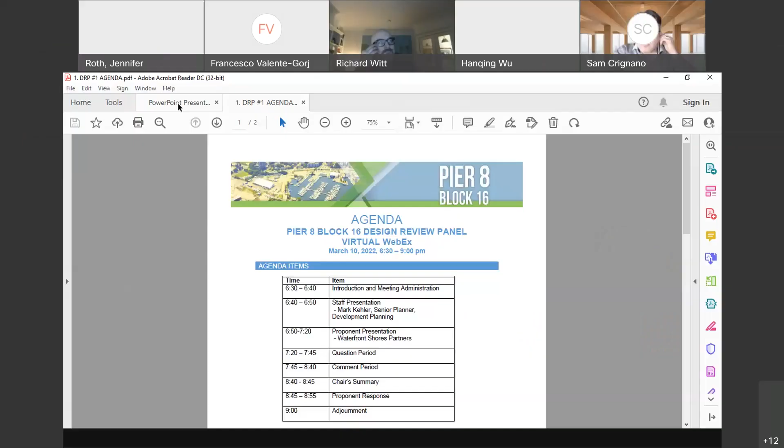Before going into the administration and purpose of the meeting this evening, I would like to start with the city's land acknowledgement. The City of Hamilton is situated upon the traditional territories of the Erie, Neutral, Huron-Wendat, Haudenosaunee, and Mississaugas. The land is covered by the Dish with One Spoon Wampum Belt Covenant, an agreement between the Haudenosaunee and Anishinaabe to share and care for the resources around the Great Lakes. We further acknowledge that this land is covered by the Between the Lakes Purchase 1792 between the Crown and the Mississaugas of the Credit First Nation. Today, the City of Hamilton is home to many Indigenous people from across Turtle Island, and we recognize that we must do more to learn about the rich history of this land so that we can better understand our roles as residents, neighbors, partners, and caretakers.

This design review panel has been called to implement the council-endorsed implementation process outlined in the Pier 8 Block 16 Urban Design Guidelines. This process has required the proponent, Waterfront Shores Partners, to develop 3 tower design options for Block 16, each required to demonstrate innovation in 3 areas: quality of life, sustainability, and exceptionalism, defined as excellence emblematic of the renewal of Hamilton Harbor.

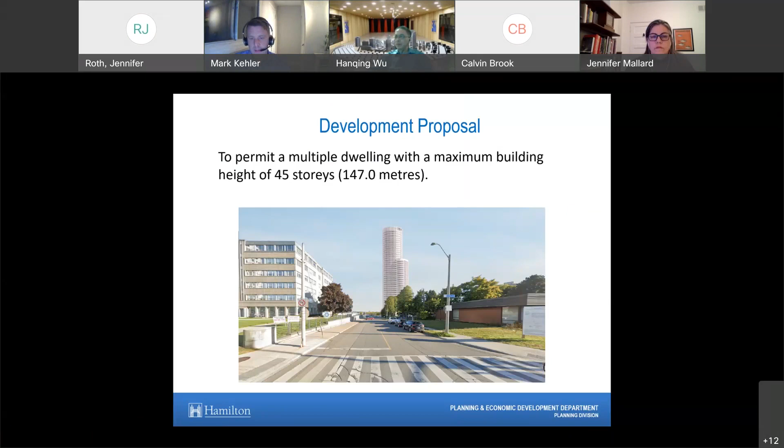So this is the location of the site. This is Pier 8. The municipal address is 65 Guise Street. The site itself is, I apologize, they're both the same color, but it's the shape inside at the north northwest corner of Pier 8. It's known as Block 16.

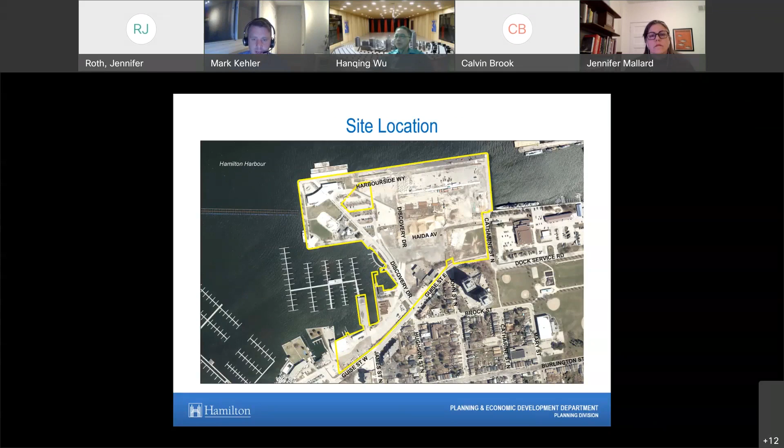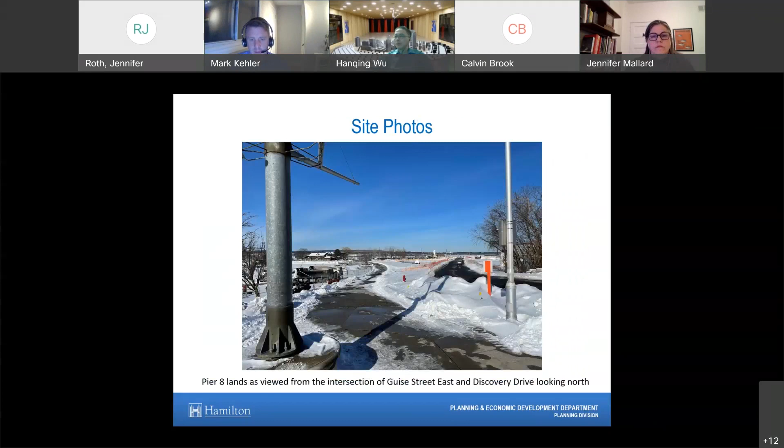So this is just a view of Pier 8 as you enter the site from Guise Street, looking towards the harbor, down Discovery Drive. Here's a closer view of the subject lands currently occupied by a surface parking lot.

Adjacent to the northwest, you have the Discovery Center, an institutional building. And to the west, you have Pier 8 skating rink and open space, and there's a Williams Cafe there as well.

And then to the southwest, you can see the North End neighborhood and downtown Hamilton further to the south. Again, to the southeast, some existing residential buildings, lower scale residential homes. And then to the east, you see the more industrial part of the harbor.

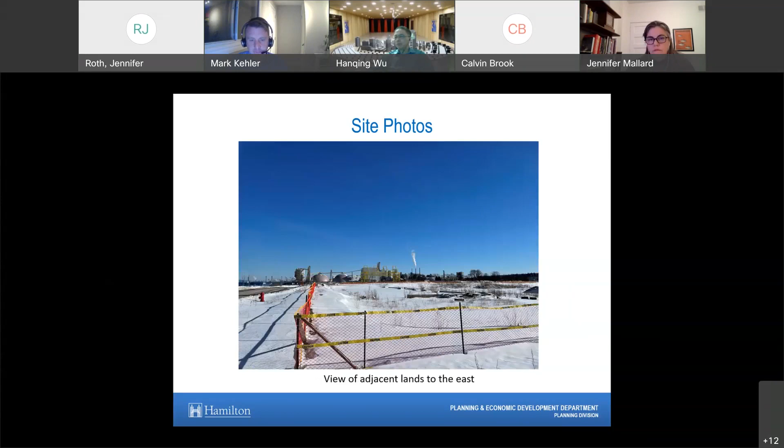So just by way of background for everyone listening, we're here in part because of minutes of settlement that were executed in September 2019 to resolve appeals respecting the zoning bylaw and draft plan of subdivision to implement the setting sail secondary plan as it applies to Pier 7 and 8.

And as part of that settlement, the parties agreed that the city would bring forward official plan amendment and zoning bylaw amendment applications for Block 16 to consider permitting a residential and mixed-use building either in a mid-rise or a high-rise build form. So that's the applications that's been submitted, and that's what we're here to review today.

As part of that settlement, the number of units within Pier 8 would not change. It's capped at 1,645. As well, a minimum of 15% of those dwelling units are required to be family units, which is defined as having 2 or more bedrooms.

And as part of the settlement, there's a sliding scale where with additional increases in height on Block 16, it would result in additional required family units. So in this case, for a 45-story building, there would be an additional 150 family-sized units above and beyond the 15%.

So following the settlement, the city has undergone a 2-phased planning process. The first phase was completed in July 2021, and it was the Pier 8 Block 16 Urban Design Guidelines. And those guidelines built up upon work that was done previously for Pier 7 and 8 and has provided more specific design direction for Block 16 itself.

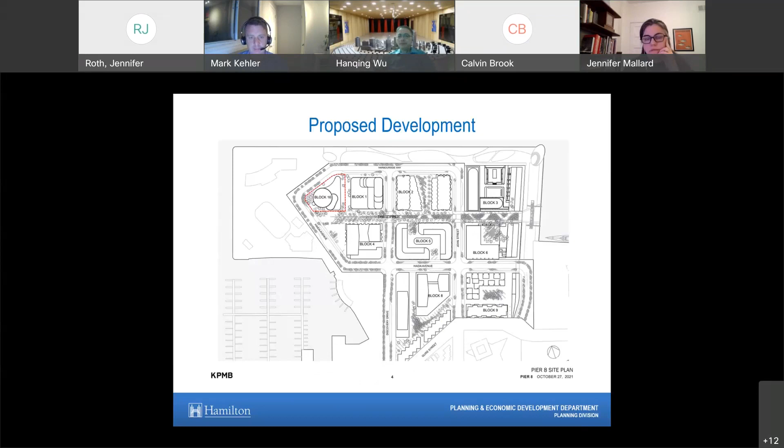So I won't spend too much time on this. This is the location again of Block 16 within the overall Pier 8 development site, and here are the three tower proposals that will be detailed by the applicant.

Some key considerations, based on the guiding principles of the Pier 8 Block 16 Urban Design Guidelines — I'll read them out quickly. Recognize the public role of the site, requiring high quality development of exceptional design. It should create a metropolitan landmark and visual anchor at Pier 8 that is emblematic of the harbor's renewal. It should express environmentally sustainable features, green design references, and high quality landscaping. It should animate surrounding pedestrian areas with active uses and create a high quality, accessible public realm.

It should offer a high quality of life for residents of all ages, including family-friendly unit design and generous outdoor living space, and should also provide appropriate transition and sufficient separation distances between development on the surrounding blocks and public spaces.

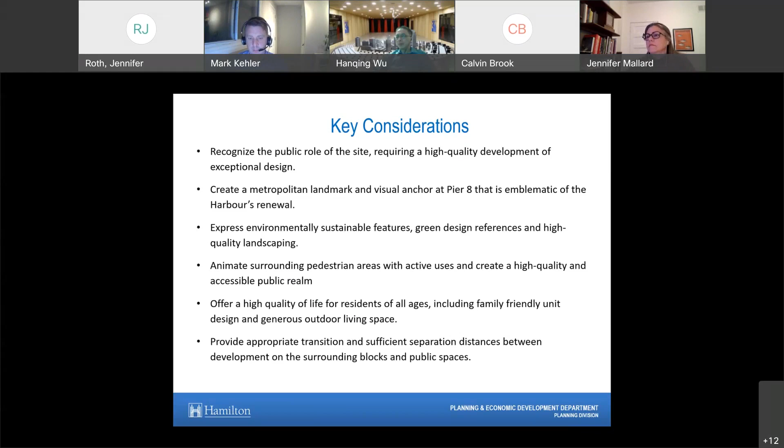We usually end these staff presentations with the questions we're asking the panel members. Jennifer Mallard has already read those out, so I won't do that again, but I'll leave those on screen as I close. There are 6 questions, and staff will take this feedback back through our review as we work with the applicant to improve the proposal going forward. That concludes my presentation — happy to answer any questions.

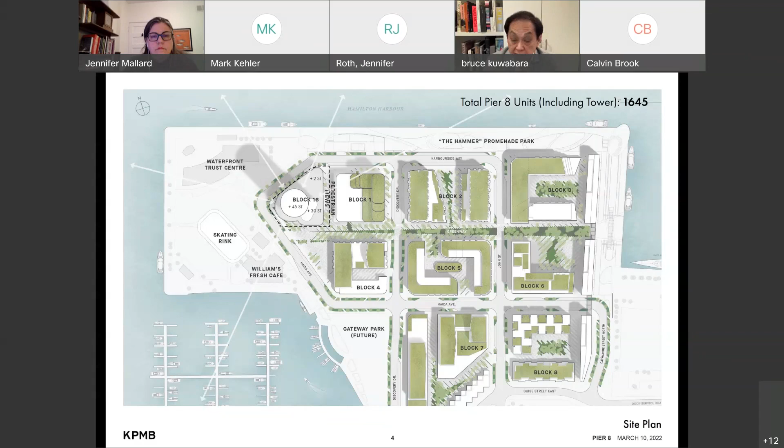Okay, the three lenses: design excellence, sustainability, and quality of life are very comprehensive. Let's go to the next slide.

Brook McIlroy did the urban design guidelines, which this building, the way we've approached it, tracks. There's a chart of every condition of the guidelines, and where we are at variances, we make note of them. But from the project that was the demonstration project in the urban design guidelines, we rotated the building more to the west and away from Block 1.

And we developed a circular form that addresses that panoramic view and the idea that this is a vertical marker. The podium, the three black dots, are really the front entrance of Block 16, but the front doors to Williams and the Discovery Center, which will become a welcoming center. It's going to go through its own transformation.

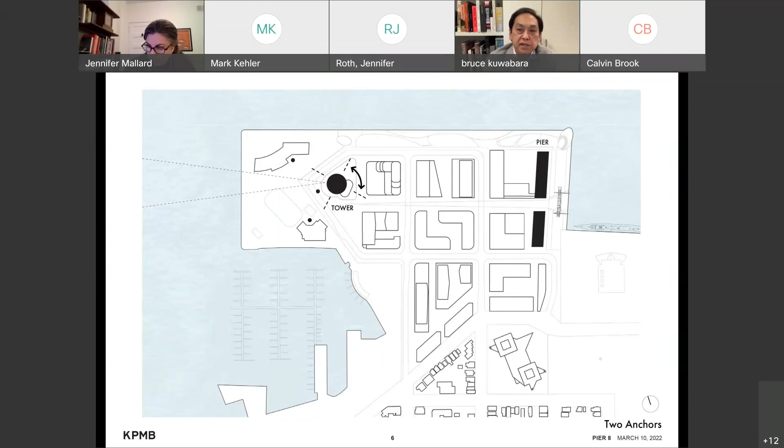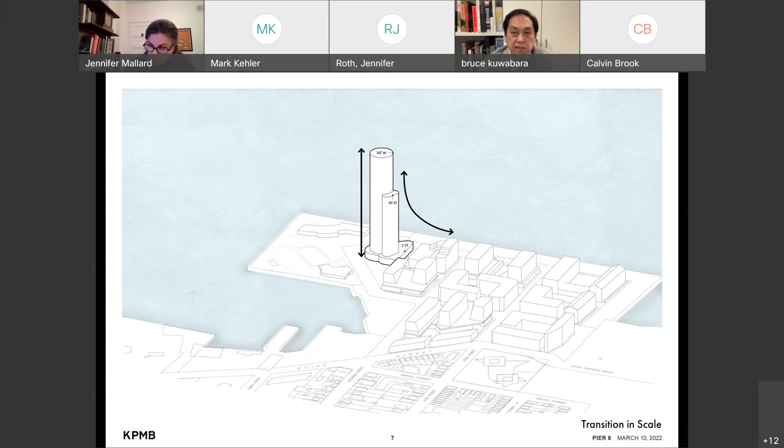This is a cartoon diagram of the three fundamental elements: the podium, a 30-story element which steps, and then out of which emerges the primary tower to 147 meters. So there is a transition, and you'll see it in some of the comparative perspectives. Next.

The same set of elements with a little more detail. The idea that we would make something at the top that was identifiable, the shaft of the building, where we actually have a very disciplined floor plan, which we can show you. And number 3, that whole floor is amenity space for residents, and the facade is extended up to provide wind protection and enclosure privacy.

Number 4 is the at-grade townhouses, which face number 5, the pedestrian mews that leads to the water. Number 6 is the vehicular drop-off for garbage and loading, and also drop-off for Uber, taxis, and vehicles descending to the lower parking levels. There is parking below this building on multiple floors. Number 8 is the podium on the Greenway side. Number 7 is a kind of loggia that wraps around the prow end of the site closest to Williams. Next, please.

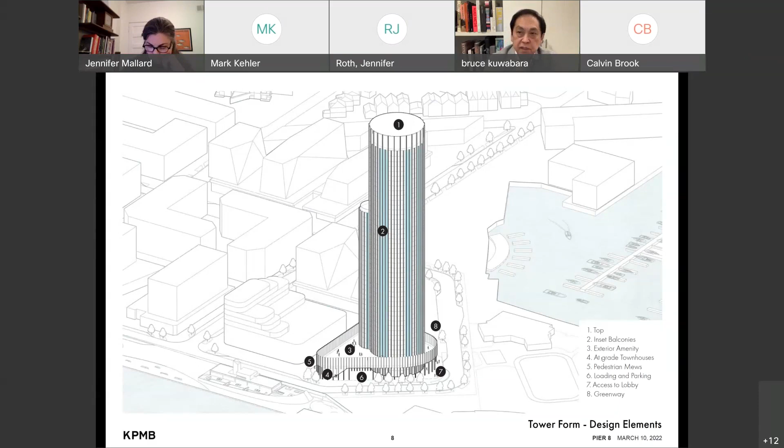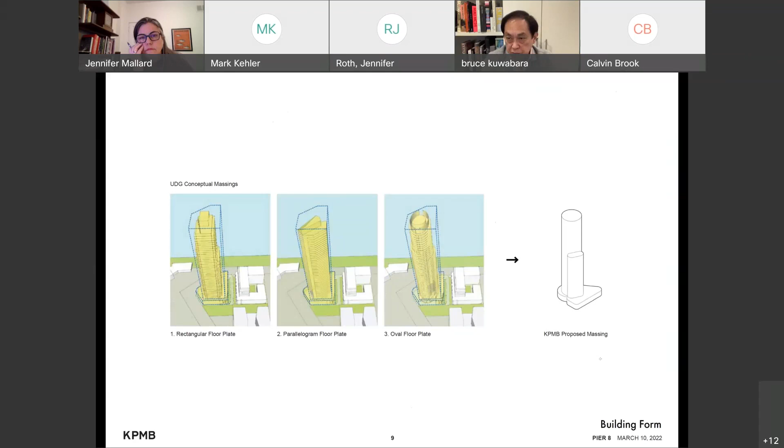These are the three demonstrations of building form from the urban design guidelines, all of which fit within the dotted blue envelope, a kind of five-sided figure. In that comprehensive study that led to all the urban design guidelines, number three, the oval scheme, was preferred. We developed a purer form than that, and rotated it to the west on a podium that is continuous and outside the footprint of both the secondary and primary tower.

We worked closely with RWDI, who most of you are familiar with, doing computational fluid dynamics modeling of this site, which is inherently windy on the water. That'll always be a windy site, but we wanted a form that would be aerodynamic and not contribute to negative wind impact on the public realm, on the podium, balconies, outdoor private areas, and the rest of the fabric and public spaces of Pier 8.

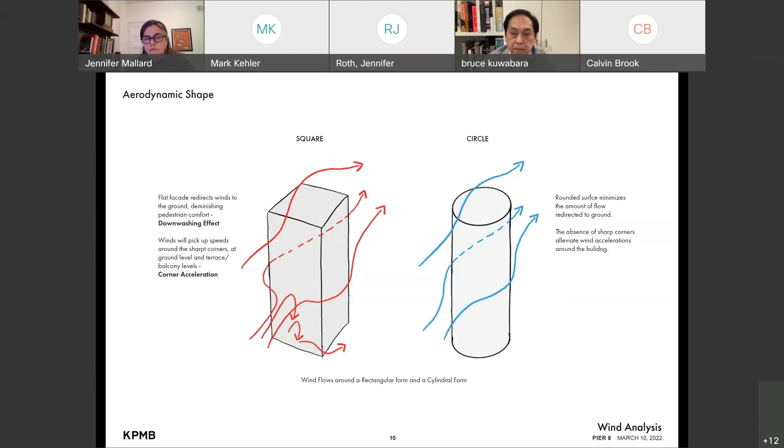Compliance with the urban design guidelines has been something we track very rigorously, and there's a chart that you'll hopefully get access to, showing point for point how the scheme responds to everything in those guidelines.

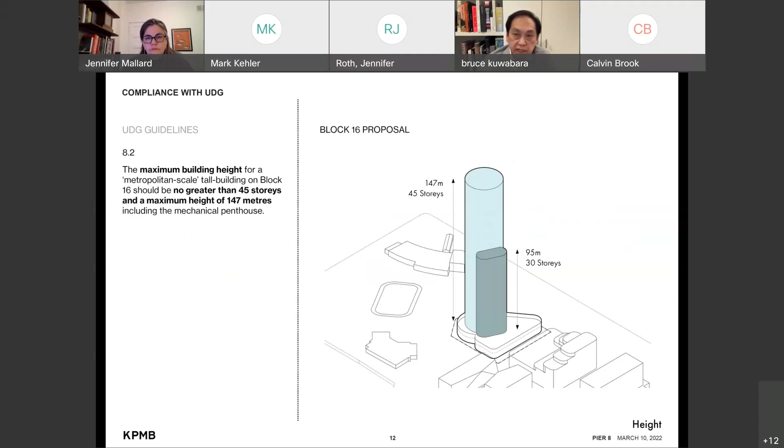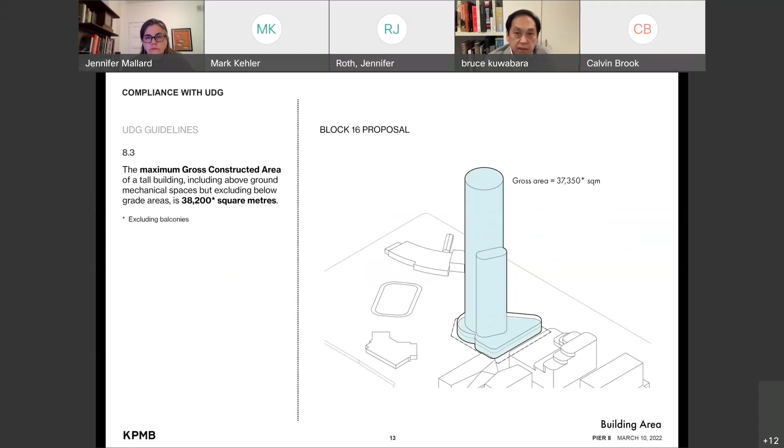I'll give you some examples. On the left is the guideline and then the proposal. We're meeting all the height limits and area requirements. That was building height, and then there's the gross floor area for zoning above grade.

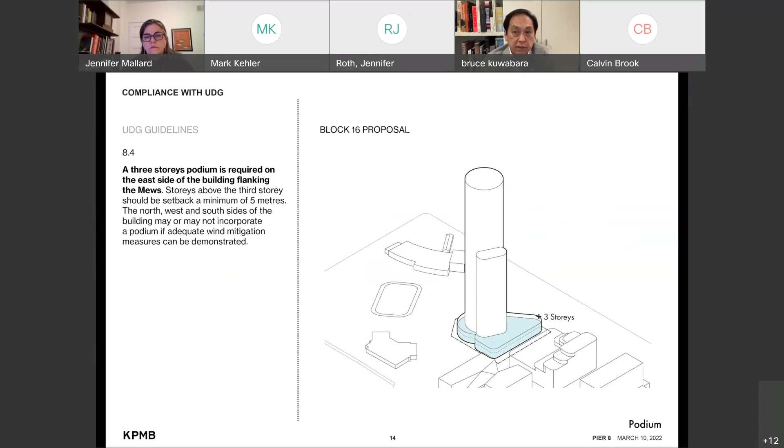The three-story podium - we didn't have that at the time of submission. After RWDI finished their preliminary report, we extended the facade another floor, which provides a lot of protection for ground level comfort for pedestrians.

Just some diagrammatic drawings of the podium and the interior area, and then the roofed area of the podium. It's quite an interesting figure - this long row of townhouses facing east, the secondary tower making a transition over the ramps that go below grade, and then the tower achieving a kind of pure form right on the nose of the site.

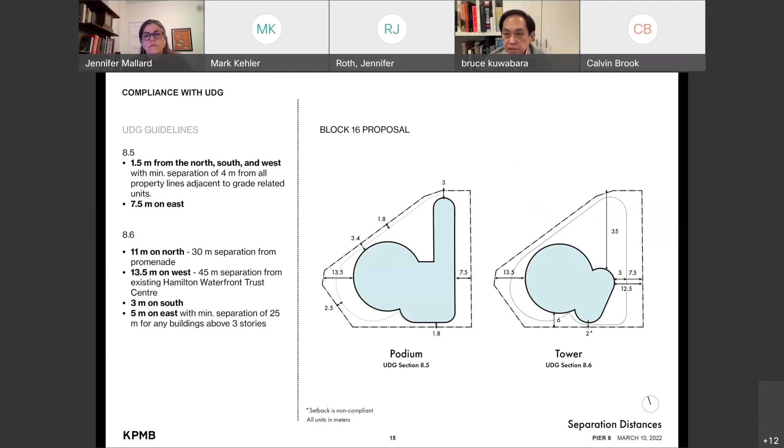The floor plates - these are the interior floor plates as presented in the urban design guidelines. So 650 and 850.

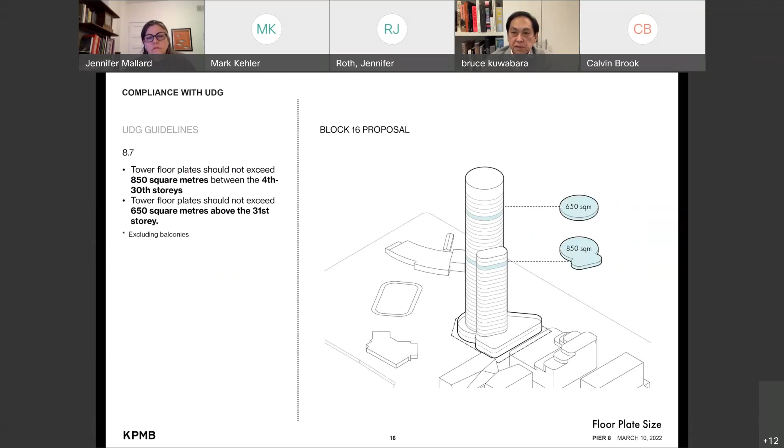And then the impact on the public realm, or the shaping of the public realm. A lot of this is common to all three, although depending on where the design goes, I fully suspect these will move in relationship to the design of the secondary and primary tower.

There's a scissors stair, and then a moon-shaped crescent lobby with two entrances - one on Haida Avenue facing Williams and the ice skating rink, and the other facing the lake, protected by the roof of the podium. So all of that area is protected - you have a dry area for drop off and so on. You see the garbage room, but the lobby really takes advantage of the northwest views.

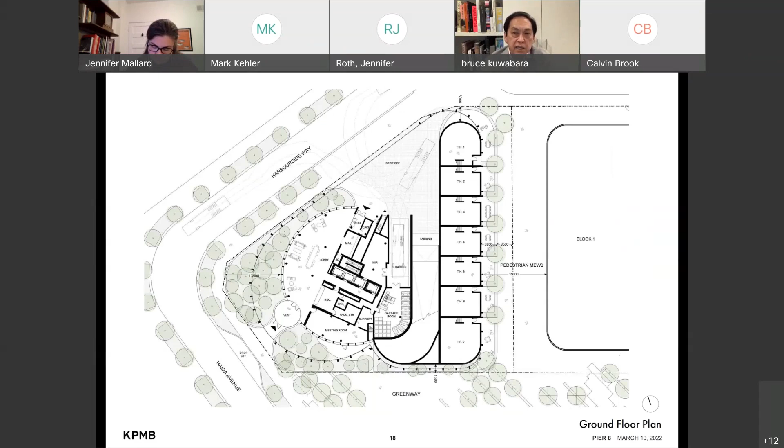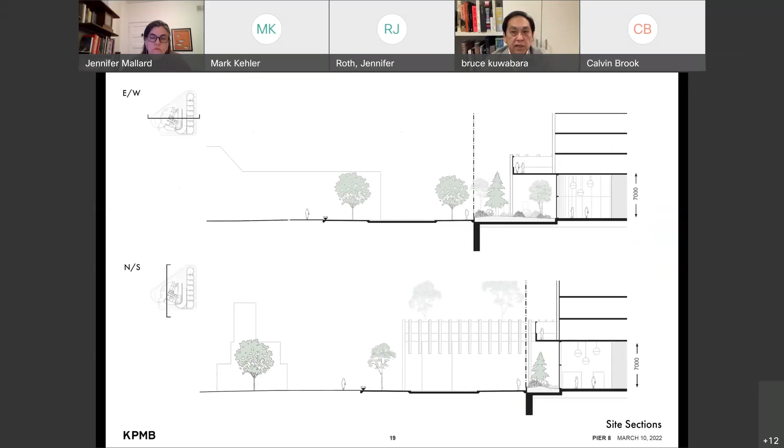These are some really early sections we did, and you'll see these will change, but it shows the podium stepping out and forming a sheltered area near the lobby, which is double height - very tall.

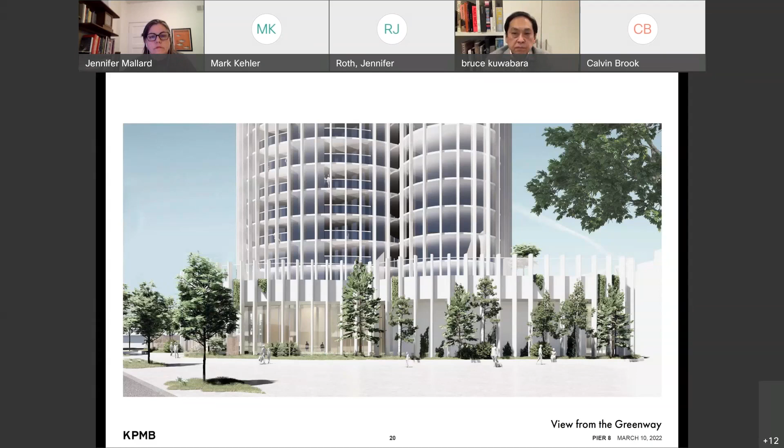The mews, very simple, but they're within the language of the podium. And they have entrances biased to the north side, trying to get a kind of corner window to living rooms and bedrooms looking towards the water.

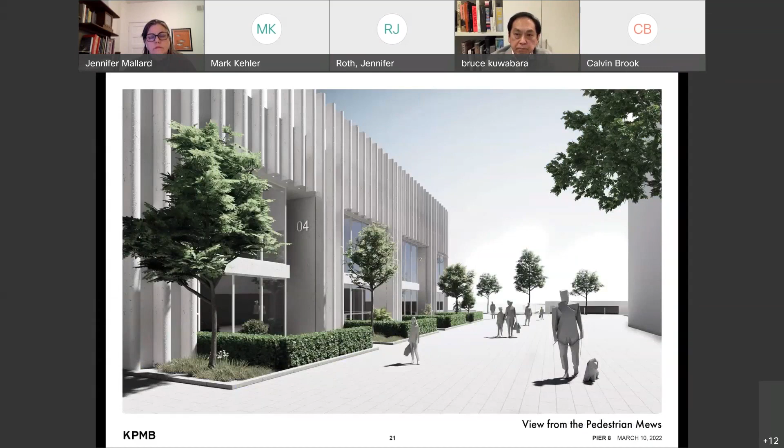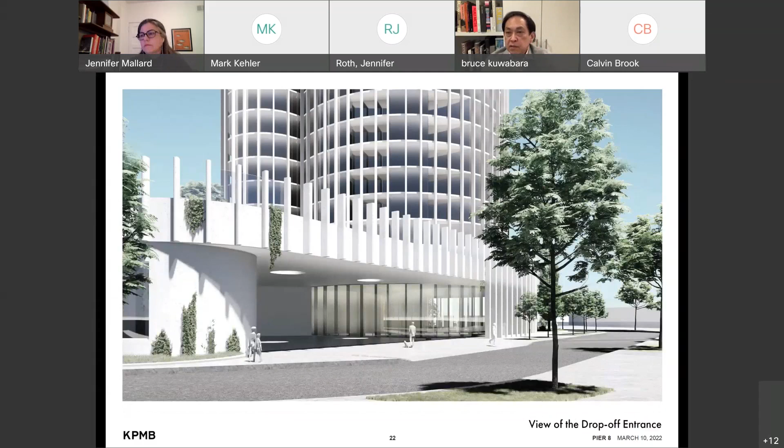Next. The drop-off court on the water side, and the townhouse, the end townhouse is at the left. Next. And the main entrance.

Have we lost Bruce? Yeah, I've lost it too. Okay. Perhaps we should go to Luca until Bruce returns. Luca, can you let him know that we don't see or hear him? I will let him know that, and I can bring up the presentation, but Jennifer will need to just enable the sharing. For whom? For Luca? Well, sorry, I guess we don't need to. It's still showing. Can you host the slide deck there, Luca? Well, it's Francesco that's actually driving it. Oh, okay. So happy to skip ahead to the sustainability section while Bruce navigates the bandwidth or technical difficulty. So Francesco, if we can advance, I guess, the slide. I will skip ahead. I'm also trying to text with Bruce to see what's happening.

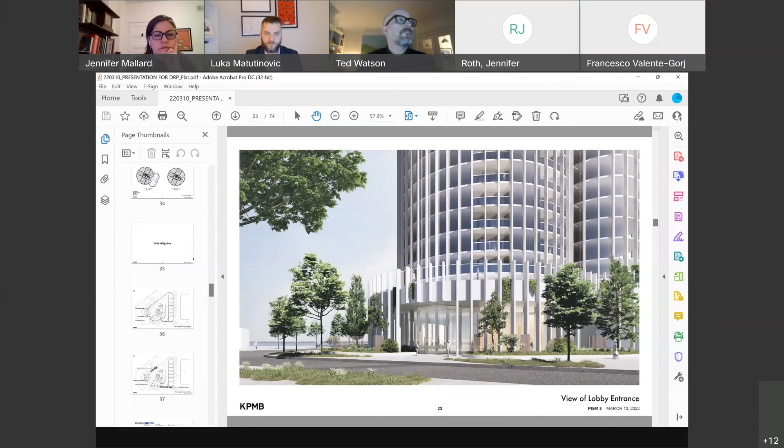Perfect. Well, thank you everybody for taking the time to listen to us share this exciting development. I'm going to talk a little bit in terms of sustainability and quality of life of the proposal. We can go to the next slide.

One of the things I wanted to set a bit of context on is how we've approached this. The urban design guidelines created are, in my experience, one of the most comprehensive sets of sustainability frameworks that have overlapped to create a framework that's going to lead to something that, quite frankly, hasn't really been delivered to date. So we've created a sustainability implementation plan, and I'll walk you through that, and then talk more about the specifics of what we are doing. I think it's important to recognize how we are managing the guidelines, the complexity, and the implementation of individual elements. Next slide, please.

In terms of context, the requirements and the sustainability framework are very complex. It is very robust and comprehensive. There are elements of it that are very progressive, and elements that are, quite frankly, market leading. There's a good balance of qualitative and quantitative measures and items. Some of them are not entirely specific; there is more of an intent that we are demonstrating compliance with, and I think that leaves room for the necessary design iteration that needs to be part of this process.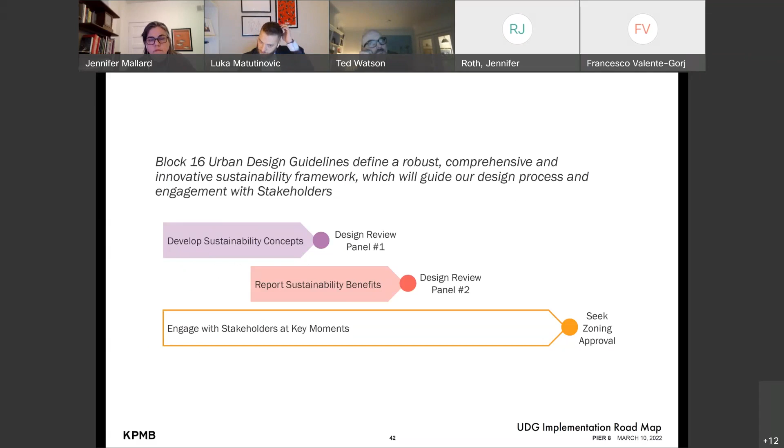This is broken up into 4 broad categories. One is about the integrated design of how all of these things fit together - envelope, mechanical, electrical, energy supply, structural systems - how all of that coordination and these design concepts are fitting together.

There's a stream of performance analysis with respect to energy modeling and life cycle, directly addressing the operational and embodied carbon elements. And then there is a certification work stream.

This will be, to the best of our knowledge, the only development of its kind that will be triple certified - Energy Star multifamily high-rise, Well standard, and LEED certification.

And so there is a work stream that is advancing how all of those elements fit together and how they respond to the urban design guidelines.

And then there is this process that we are in right now in terms of stakeholder engagement, the design reviews, and ongoing collaboration with the city. Next slide, please.

You hopefully have had a chance to look at the full checklist. The vast majority of elements that relate to sustainability have been marked as compliant, or as I mentioned, the design will be proceeding in a direction where they will be met at the appropriate time and confirmed.

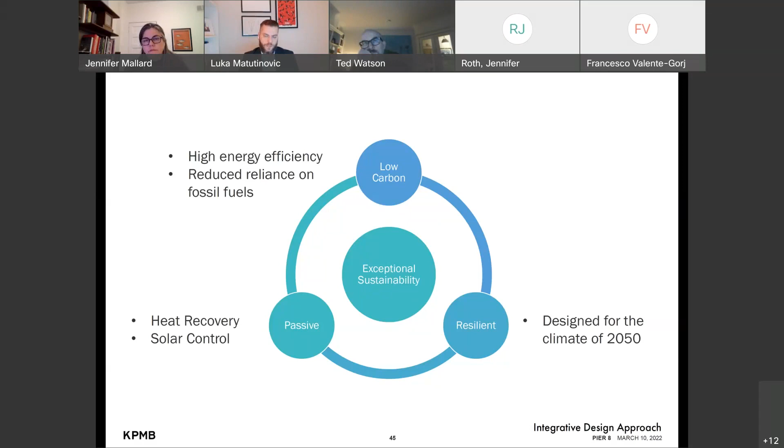In terms of how that performance analysis piece workstream fits into the integrative design workstream, you are all familiar with a top line approach to high performing buildings, in that we are starting with the site and the climate, and there's been moves already made, and analysis done by RWDI that informed that siting. And now we're in sort of the middle element where we are focused on envelope concepts that are going to be reducing loads, choosing efficient HVAC systems, spending quite a lot of time exploring the options for low carbon energy supply, and all of that is continuing to get iterated and integrated together.

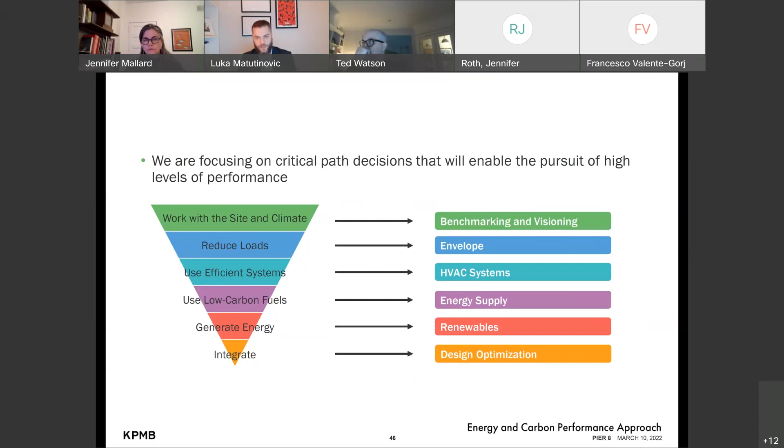Next slide, please. This is, in my opinion, a very important part of how I read the urban design guidelines in terms of the intent to reduce operational carbon emissions. This is certainly a direct contributor to the City of Hamilton's overall mission and mandate. And those of you that have spent time looking at metrics like this will immediately recognize that I'm sort of mixing and matching relative and absolute performance.

This is not meant to be absolute, but directional and indicative of where we are currently sitting and intending to achieve in terms of carbon emissions, somewhere between 30 to 50% better than what would have been typical of a Hamilton high rise. We can return to this if there are additional questions.

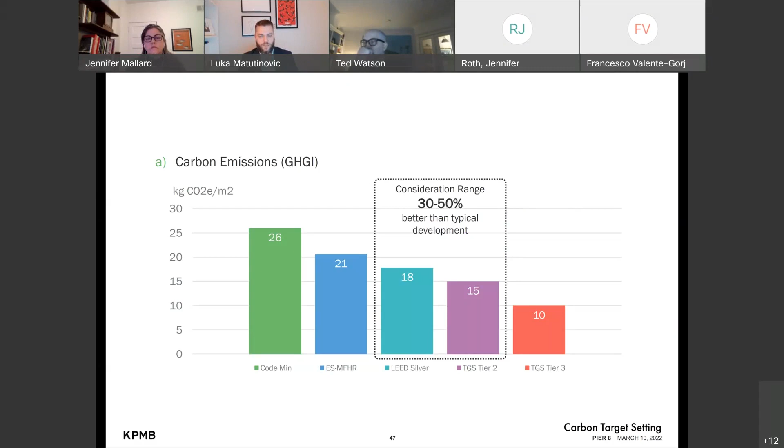Then in terms of energy intensity on the next slide, similar comment about these not necessarily being representative of every LEED silver building at an energy use intensity of 150, but they are directional. We are showing some Toronto Green Standard benchmarks that some of you may be familiar with, in terms of where we are currently positioning ourselves in the design strategies being adopted.

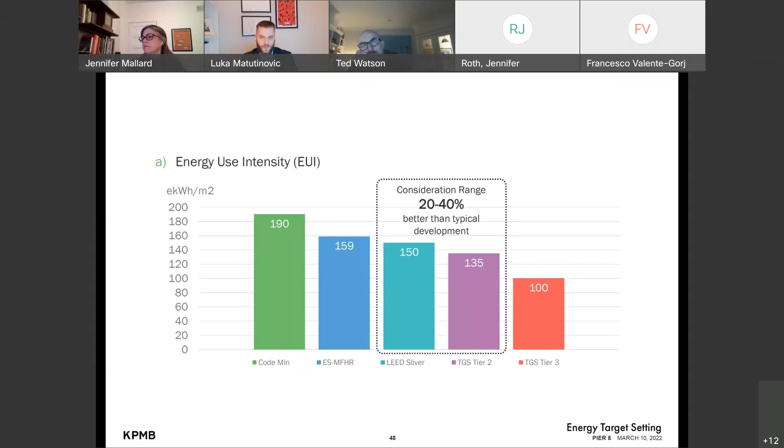In terms of specifics when it comes to the things that will drive energy and carbon performance, what we're showing are key design drivers and our current level of commitment. The second column is things we are validating and may be able to introduce. The last is an aspirational column, some of which may be challenging, but some we may really want to focus on, geo-exchange being the one idea we're really trying to explore in terms of delivering exceptional operational carbon performance.

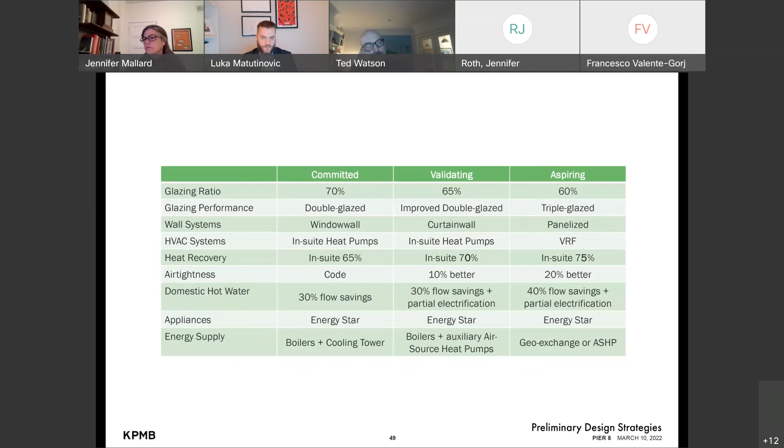In terms of quality of life, this is where we are demonstrating innovation and really going beyond what has been done to date. I'm not aware of any residential building of this kind registered for the WELL standard. The WELL building standard is a very robust framework with 10 key concepts having to do with the air we breathe, the water we drink, how we experience space, and the kinds of materials we're putting into our buildings. This will be one of the ways we demonstrate quality of life, and many elements of the urban design guidelines will directly be met through pursuit and achievement of WELL certification.

Examples of what we mean by that, and some initial moves being factored into design: water quality, air quality testing and monitoring systems, providing access and connection to nature, being mindful of acoustic privacy, and creating something that will really be a delight, a beautiful building and site that can be experienced and enhance quality of life and well-being. I think that's it for me.

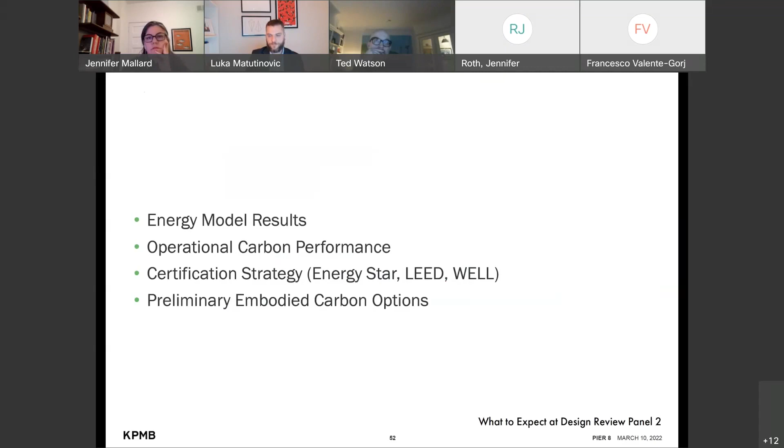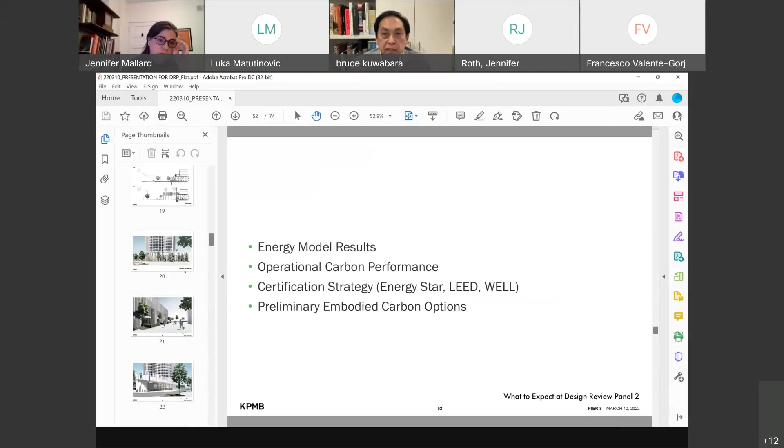Okay, I hope you can hear me now. We can. Okay, good, sorry about that. No, we can go back and pick up, and I'm just going to go as quickly as we can through this. We're walking around the site.

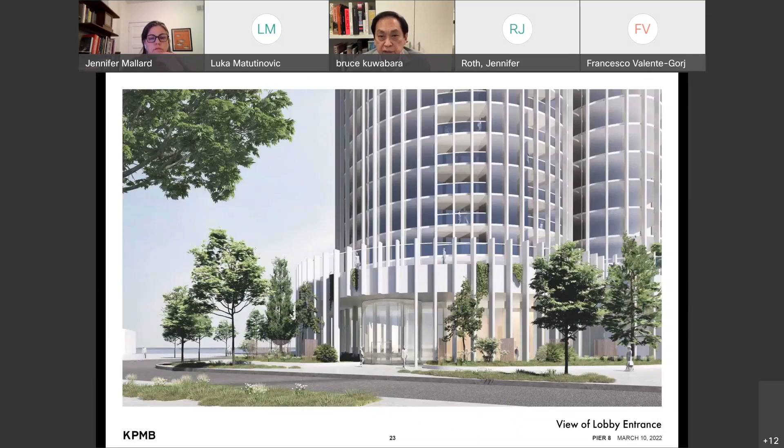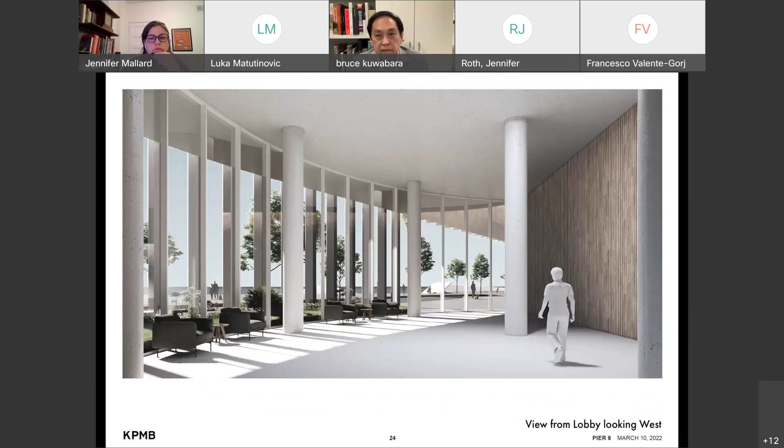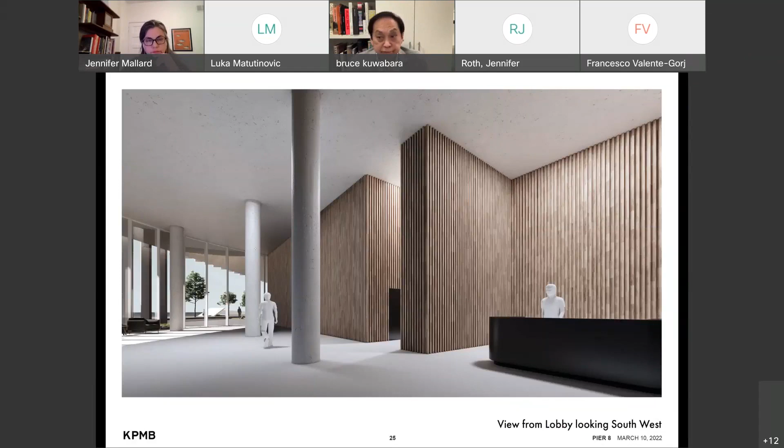Go to slide 24. This is a very preliminary view of the lobby looking West. You can see the elevator core and reception desks, very notional, but very generous and very open to the water's edge.

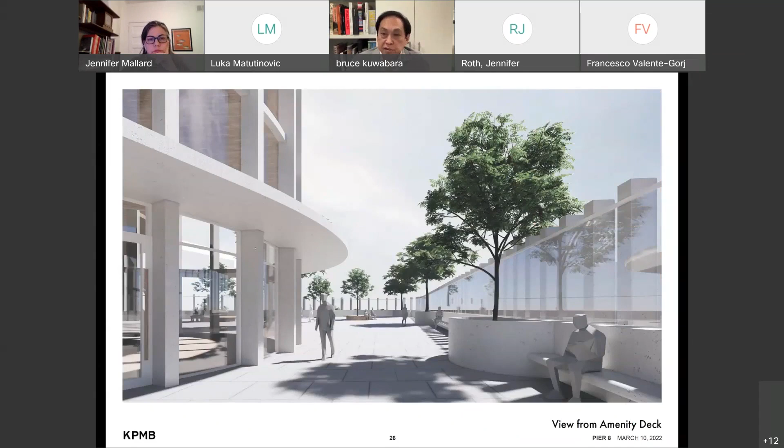This is up on the roof level and the amenity level, which is where the tower is, you can see it on the left. There's a protruding canopy which helps comfort levels and downdrafts, then a tall glass screen and areas for planting. These are just the ingredients, not the final design.

And this building at Pier 8 is, in a way, really seen from these other landmarks in Hamilton. Therefore, for me, it implies a kind of civic quality to the building. That's what we would like to achieve, something that doesn't look like a commercial residential building, but something much more abstract, simplified, and pure.

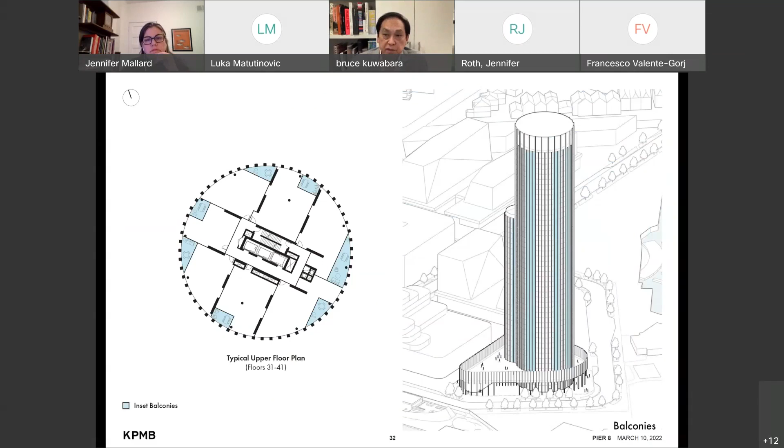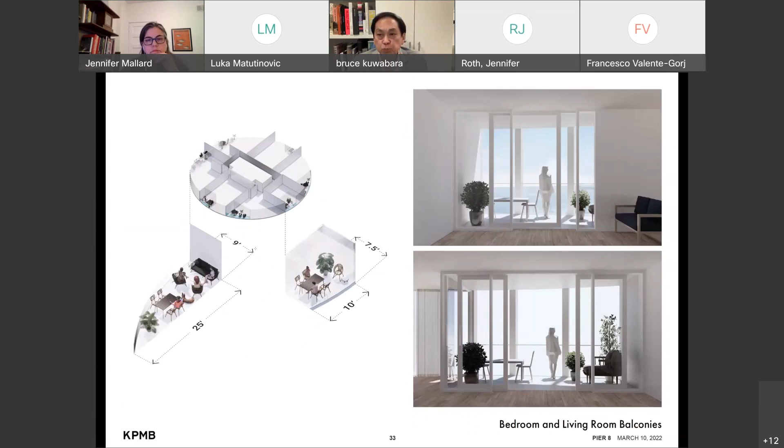Just some diagrams of dimensions so that you could use those spaces as outdoor living spaces, furnish them, eat outside. And then the two floor plates, the Pier upper part from 31 to 41, and on the left, the lower tower with the 4 elevators. You see all the elements of the core, and also the 2 and 3 bedroom units, of which there are many.

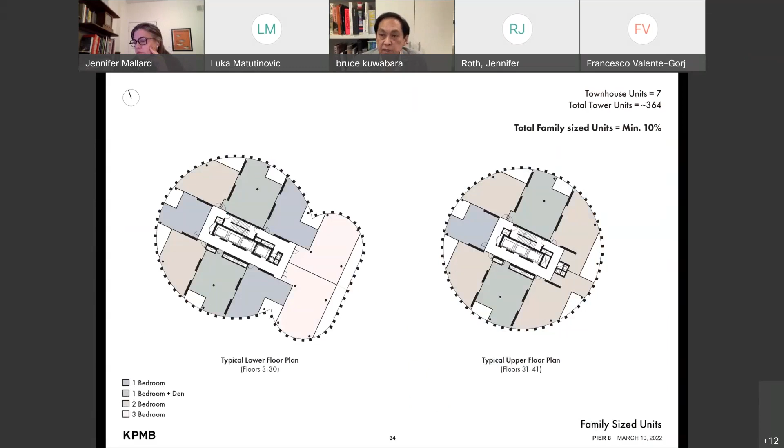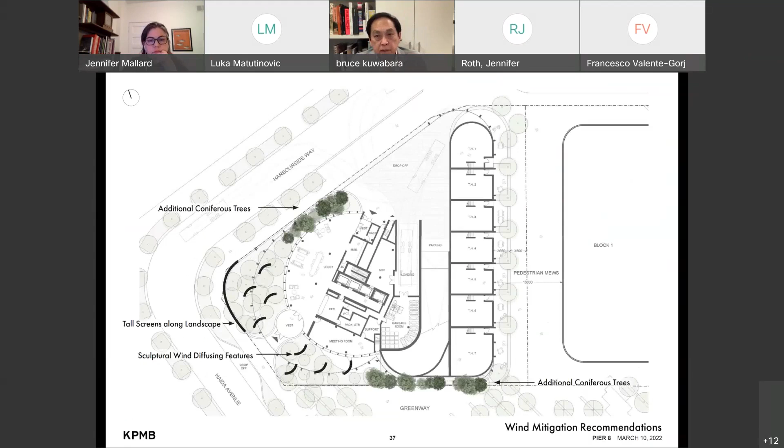To create wind mitigation, elements that RWDI suggested as screens and coniferous plantings. The heavy wind is from the south and the west. Examples that everyone talked about, but we wanted something integral with the building form.

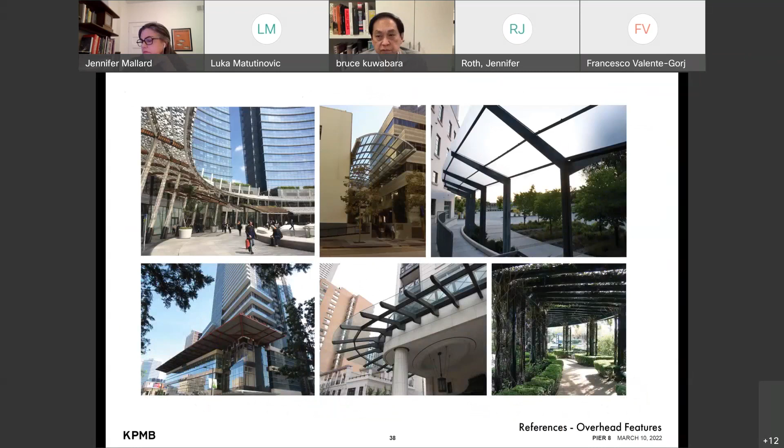And then let's jump across this to the 3 building options, and I'll try to wrap this up. The 3 design options are based on the fundamental form of the massing of the podium, the 30-story and the 45-story. The cylinder was what we developed first, and we thought it was really powerful and unique.

But we were asked to really look at some other options, and we looked at the idea of the waves, which was interesting because it began to create concave and convex surfaces, undulating and really disciplined to what is essentially a kind of 9-square plan for the upper part of the tower. And it also had the opportunity to segue into the 30-story tower in a fairly graceful way.

And then we developed Lily, which has a more organic form, more reference to a botanical shape, a lily, but abstracted, having the same fundamental character in terms of being aerodynamic, and also a different scale of transition into the 30-story element, which you see off to the right. It's always been a big concern for us.

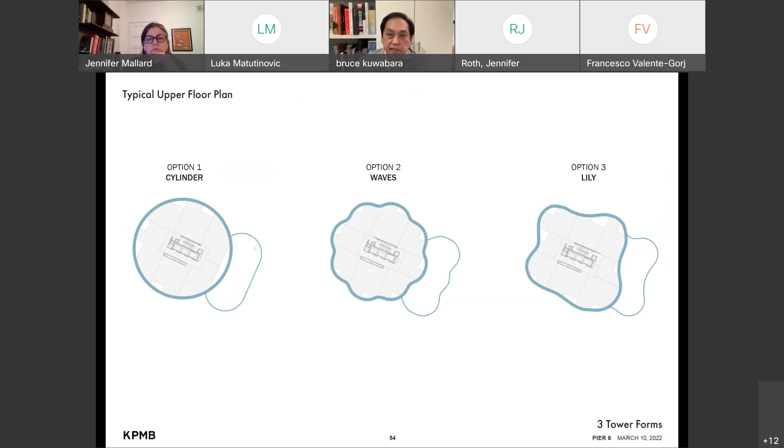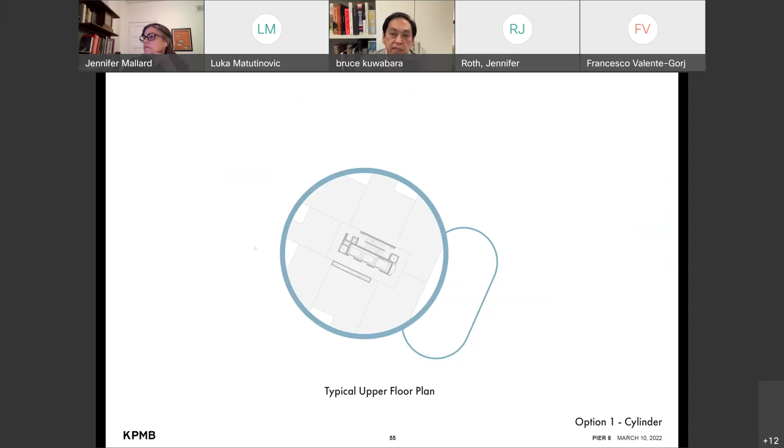So the first one has vertical spacing of vertical elements which roughen the surface. If it were smooth, it would be a different story. We want a rougher texture on the elevation of the building, having to do with wind mitigation.

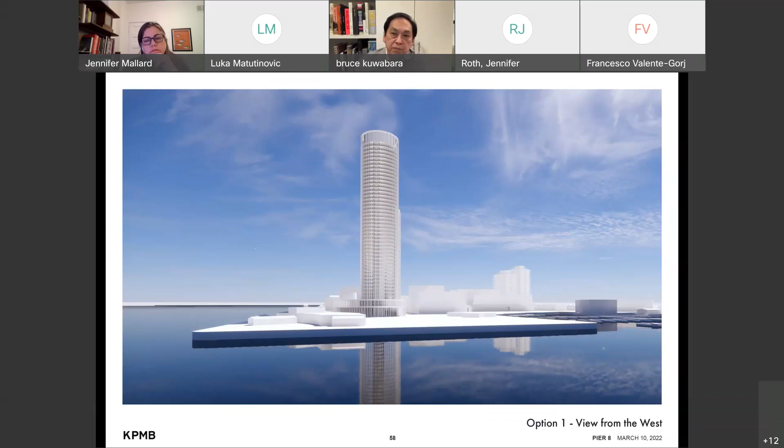The idea is that the roof is set back, the mechanical room and the elevator overrun and penthouse are there, but we think we can make something very subtle yet very strong in scale with the whole building. From the Greenway looking west, you see the value of the 30-story element stepping up to the cylinder, and a bit of the podium.

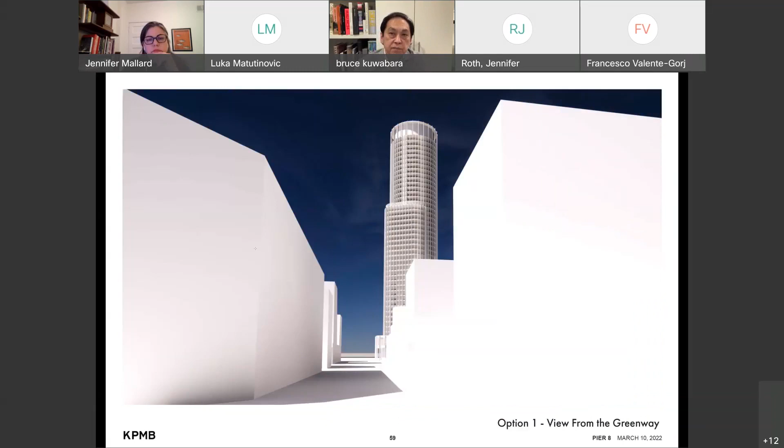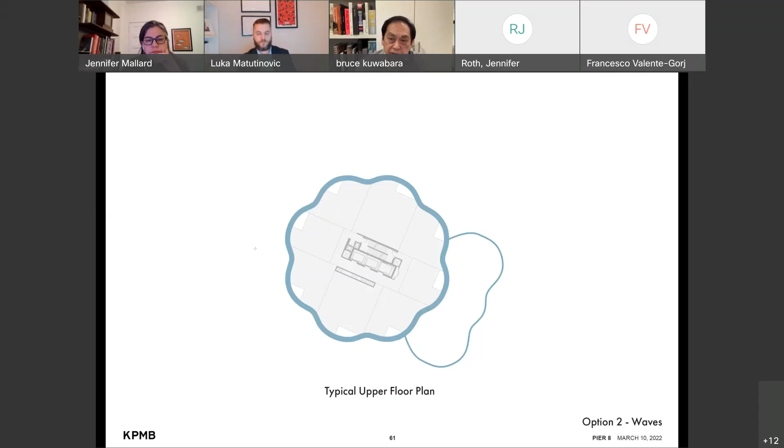It kind of creates more vertical creases on the building and bay windows around it.

And a kind of rippling effect of the cylinder. The cylinder is very singular.

And then the last option is Lily, which is slightly oblong and kind of beguiling because it's not symmetrical in any way, and it has a suppleness, but it captures that floor plate really well.

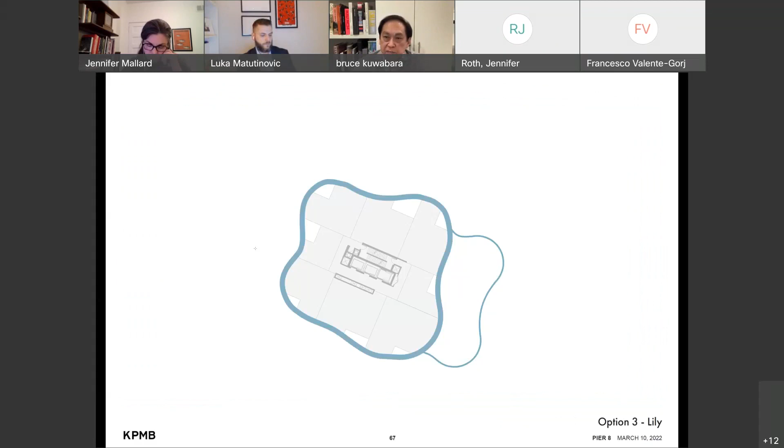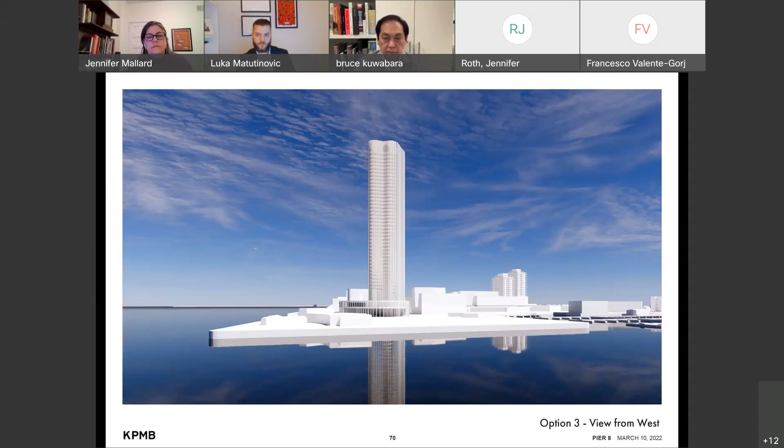On James Street. From the west. From the Greenway. And from the air.

And then this is the concluding slide, which is really essays on and iterations on a fundamental form dealing with the perimeter, and I think the metaphor of the building, while retaining the high standards of sustainability for all of them.

I don't think one is more sustainable than the other. I think it should be a dialogue about what this building should achieve, no matter what option is developed, and also the quality of life. I think for all three options it should be as high as they can possibly be with the standards and certification of WELL. So those are the three: the cylinder, the waves, and the lily.